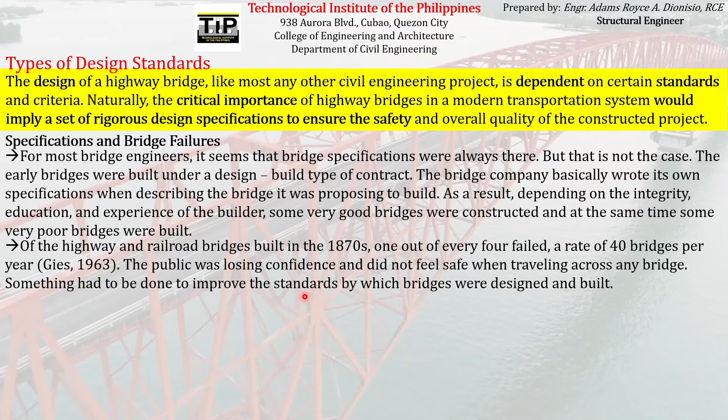As a result, on December 12, 1914, the American Association of State Highway Officials, or AASHO, was formed. In 1921, its Committee on Bridges and Allied Structures was organized. The charge to this committee was the development of standard specifications for the design, materials, and construction of highway bridges.

These specifications have been reissued periodically to reflect the ongoing research and development in concrete, steel, and wood structures. In 1963, the AASHO became the American Association of State Highway and Transportation Officials, or AASHTO.

So this is the current logo of AASHTO, the American Association of State Highway and Transportation Officials. As you can see on their logo, they were founded way back in 1914. Before, the name of the organization was the American Association of State Highway Officials, or AASHO. But later, in 1963, the organization's name was changed to AASHTO.

So the word 'transportation' was incorporated into the name of the organization to emphasize that the organization is not only the governing body for the specifications for highway and bridge construction and design, but they also include the design and construction of all modes of transportation.

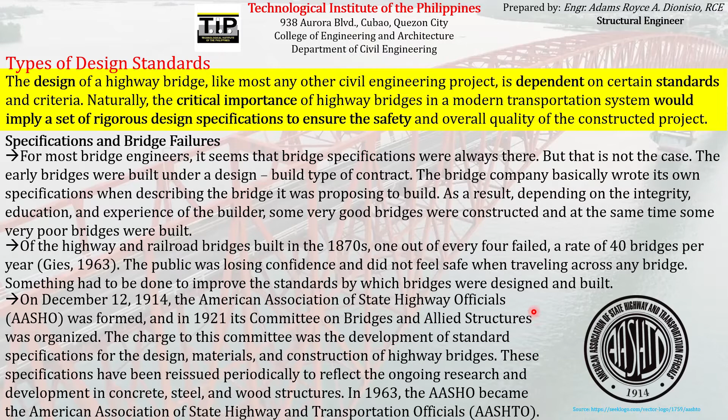So it's with the emphasis that they are the governing organization for all modes of transportation. This organization was formed to address the losing confidence of the public on the bridge structures that were built at that particular time. It was tasked to provide a standard specification for the design, materials, and construction of highway bridges. But as their current name manifests, they are not only the governing body for highways, but also for other modes of transportation. So they became the solution to address the problem of bridge failures that happened in the past.

For railroad bridges, this task began in 1899 with the formation of the American Railway Engineering and Maintenance of Way Association, or AREMA. This is their logo. Their main tasks already began before AASHTO was formed. They were tasked to address the problem for railroad bridges way back in 1899. That is AREMA, an organization mainly focused on railroad bridges.

Specifications are constantly changing and adapting to new developments in the practice of bridge engineering. Just like what I've said before, the standard specifications published by AASHTO were constantly updated periodically. That update is actually the result of new developments in the practice of bridge engineering. Although in some cases, new information on the performance of bridges was generated by a bridge failure.

Several lessons have been learned from bridge failures that have resulted in revisions to the standard specifications. So it's not only the new developments in the practice of bridge engineering that were the reason for the revision of the standard specifications, but also because new information can be generated from the bridge failures that happened in the past.

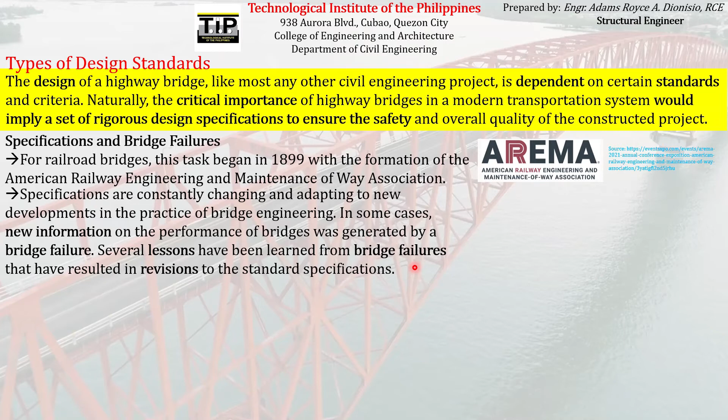After we have learned what might be the cause of the failure of a certain bridge, we can use that lesson. One of the most famous bridge failures that happened in the past was the Tacoma Bridge, a bridge that was not perfectly designed to resist swaying.

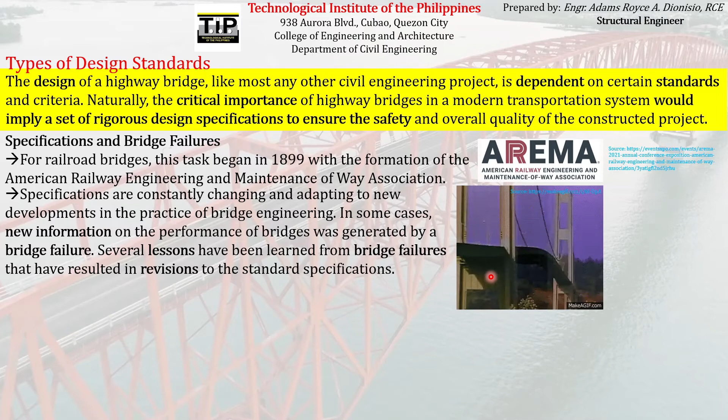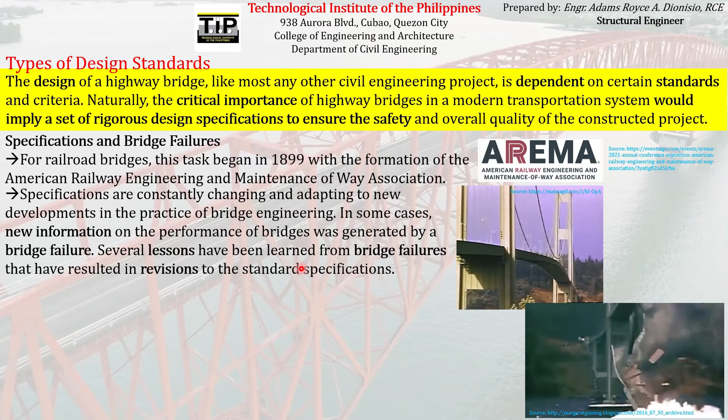As you can see here on the GIF, the bridge was constantly swaying back and forth, even though there was no vehicle load traveling on it. Because of that swaying, it led to the eventual, sudden collapse of the Tacoma Bridge. The lessons learned from that particular bridge failure and other bridge failures that happened in the past were incorporated into our standard specifications. Revisions on those specifications were made so that the lessons learned from past bridge failures would be incorporated, so that we will not experience the same bridge failure again.

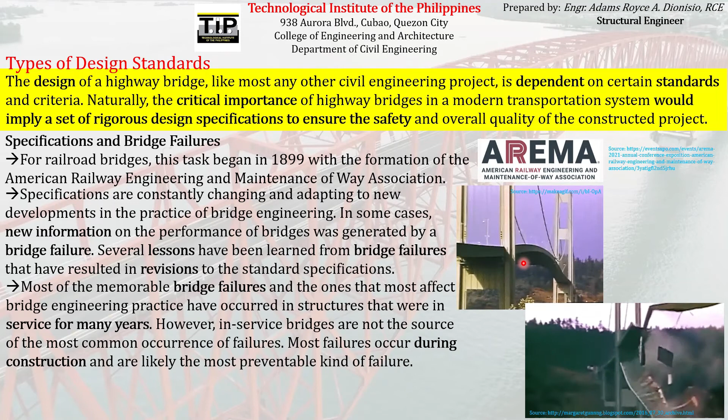Most of the memorable bridge failures, and the ones that most affect bridge engineering practice, have occurred in structures that were in service for many years. However, in-service bridges are not the source of the most common occurrence of failures. Most failures occur during construction and are likely the most preventable kind of failure. So aside from bridge failures experienced by bridges already standing for several years, bridge failures also occurred during construction. Not only erected bridges experience failures, but also those bridges still in the construction stage.

So those bridges that experienced failure during construction again gave us a very hard lesson that provided new information on the performance of bridges. Again, those lessons were incorporated into our standard specifications, so that we will not experience the same failure again on the bridges we design presently in the industry.

So as we can see, there is actually a relationship between the specifications we are using right now and the different bridge failures that happened in the past. These bridge failures gave us new information about the performance of bridges. This new information, together with new information gathered from new developments in the practice of bridge engineering, was incorporated into our standard specifications, resulting in revisions of these standard specifications that we are using currently.

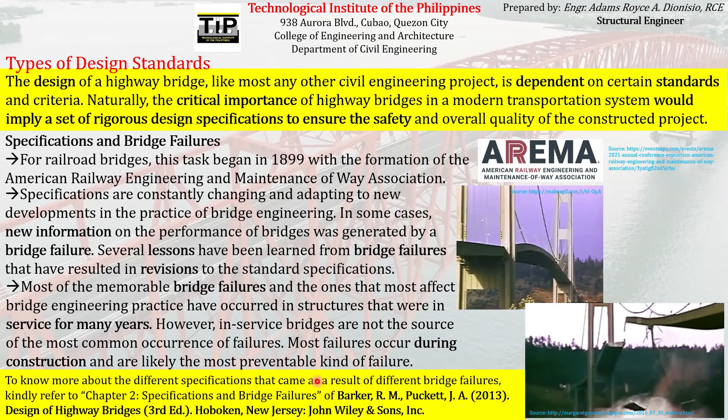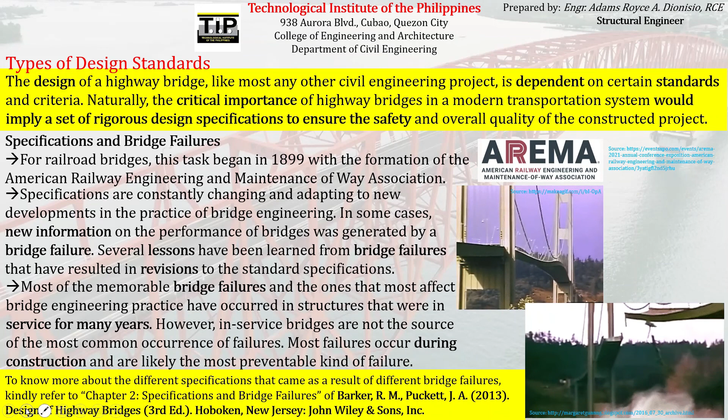So if you want to know more about the different specifications that came as a result of different bridge failures, you can refer to Chapter 2, Specifications and Bridge Failures, from the book of Barker and Puckett, entitled Design of Highway Bridges, 3rd edition.